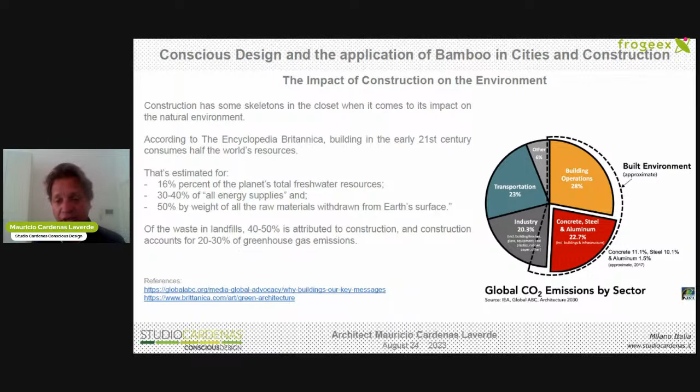So it's quite dramatic. If we keep building the same way and just think about forms—more tilted, high, longitudinal, beautiful—that's not enough. We have to tackle the construction process, and as architects we have to work on this. This is where natural materials are very strategic.

I'm in love with bamboo because of that. Bamboo is a strategic natural resource, and as a plant it's already contributing to at least 7 of the Sustainable Development Goals adopted by the United Nations.

Going back to genius inspiration such as Leonardo da Vinci, he once said, 'Nature is the source of all true knowledge.' We start by looking at other architects' work and get inspired, but that's not enough. We should look at nature and natural materials. That's where conscious design came from.

The philosophy was based on my experiences, both academic and professional, and that's the way we work. Energy saving through technology in the context of an environmental crisis is not enough.

This means that we should definitely start tackling the issues of climate change and of the damage we do to the environment through understanding how to build, through the processes and application of natural materials for construction.

For us, in the first place, is bamboo, which we believe is the product of nature that best integrates the value of ecology, community, nutrition, and beauty.

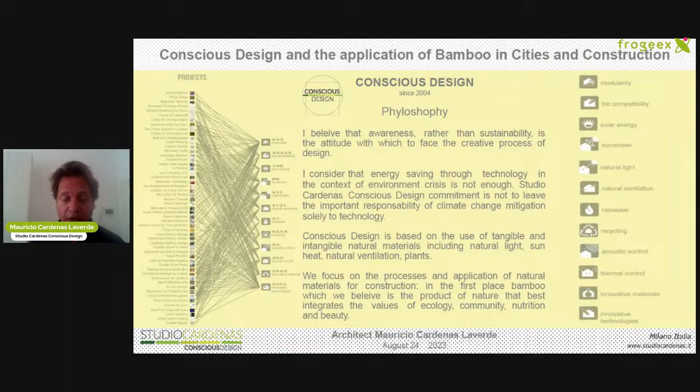There's many other natural materials which are interesting, and even some are not tangible, like natural light, or the heat of the sun. Those are also natural materials, and natural ventilation as well. And we like to work with them as much as possible.

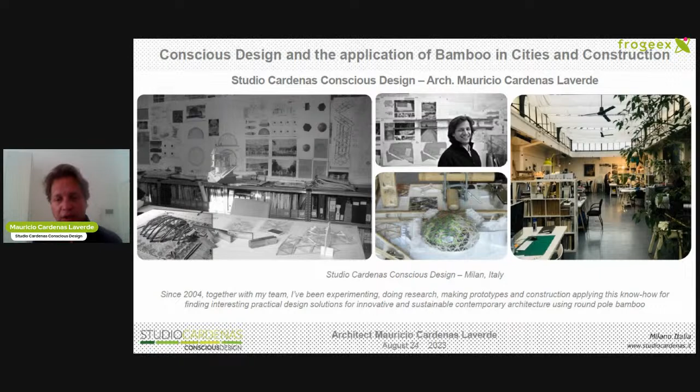Since 2004, this is our little reality studio in Milan, and we design, in fact, how to build. So we've been getting our own hands dirty to understand the best way to build.

Natural materials need to become accessible and easy to build in a context like Europe, which is an industrialized environment, right? Because mostly bamboo buildings, more than 95% of the buildings we see on the internet, bamboo constructions are in countries where specialized manpower is available.

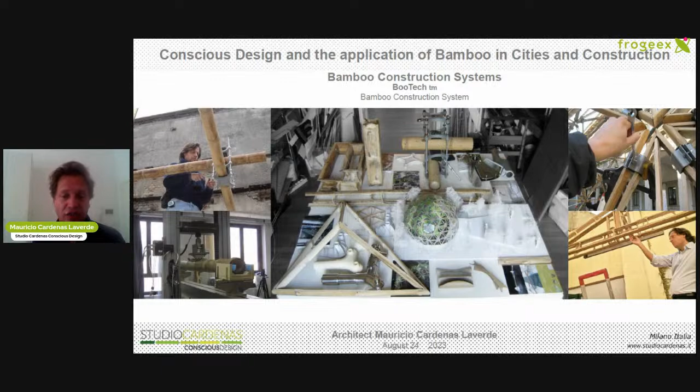In Europe, there's no specialized manpower available for building with bamboo, but there's specialized manpower to build with different technologies, such as dry mounted structures, such as facades. So that's how I designed these systems to build with bamboo.

Even in Milan, we have bamboo that can grow very nicely. There's some species of bamboo which we can already say are Italian, as myself. I'm Colombian, but living after 30 years in Italy, I'm Italian as well. So bamboo is becoming European, is becoming Italian, and it is already.

Very fast, I'll show you some examples: small scale, medium scale, and large scale. These two projects were recently selected by the Union of International Architects, Union Internationale des Architectes, based in France, for the guidebook of architecture for the 2030 agenda.

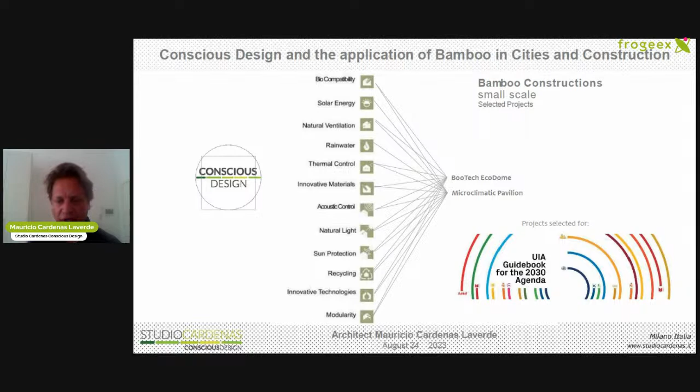This system, dry mounted connections, can be built very easily in Europe with no specialized manpower. We did this small pavilion back in 2006.

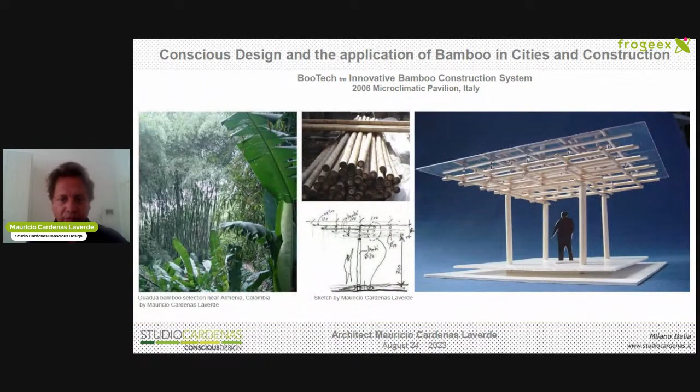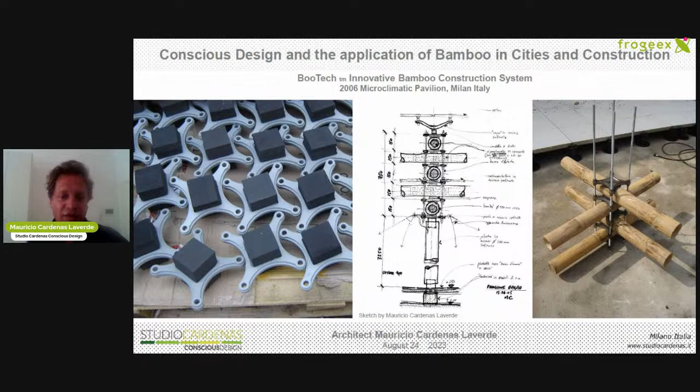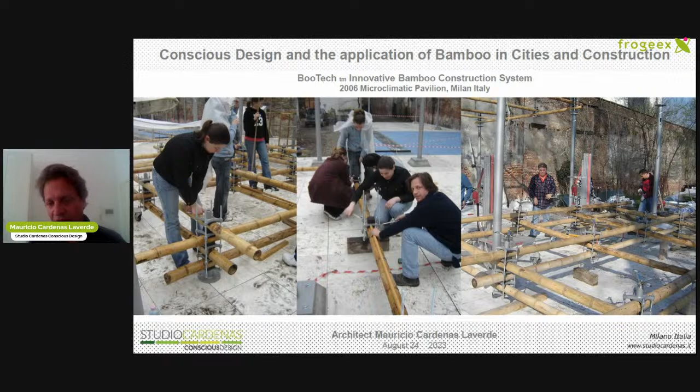We built it ourselves, as I had no client. I have to admit, I was client of myself. It was, how to say, yeah. I believe in it so much that I found sponsorships, and I was sponsored by several companies, and this is the result.

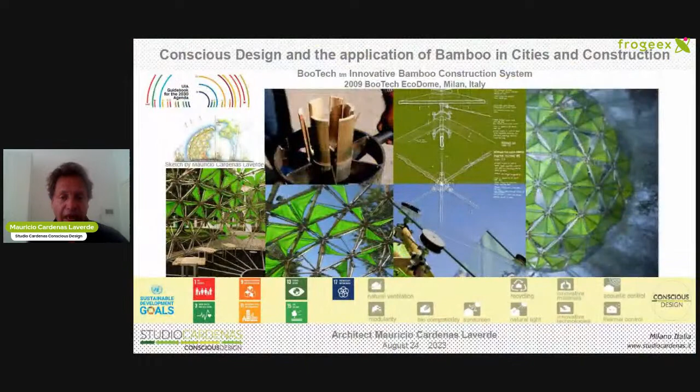Imported bamboo from Colombia. This time there was no bamboo, or at least I had no knowledge about availability of bamboo in Italy. And then we reused the same bamboo to make another structure, also with dry connection.

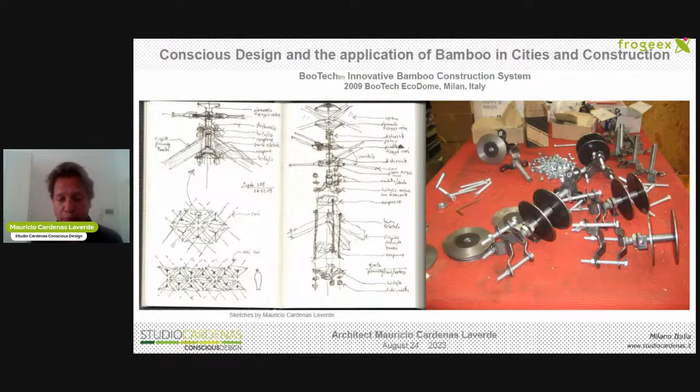So it's designing the systems. It's not just making a building and giving it to the engineers and construction companies for them to resolve, as usually, unfortunately, is done by most architecture companies. But it's resolving the most important problems, which is how to build and how to make bamboo become contemporary and become European, in this case, Italian.

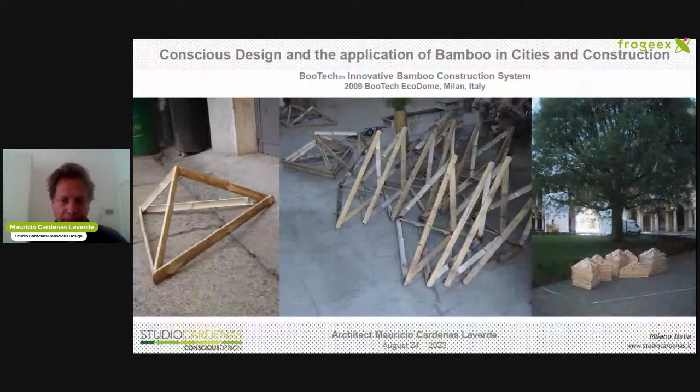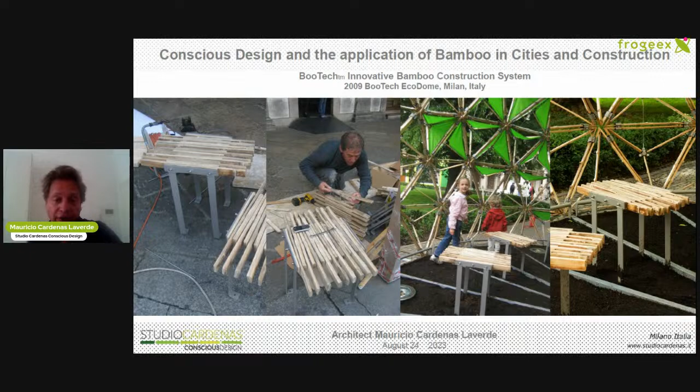Fast, just to show you, here we see earth on the ground, there's soil on the ground. So the soil is another interesting material. Here it's for giving weight to the cupola, giving enough weight for it to be stable. But we'll see in the next project how soil can be a very interesting construction material as well.

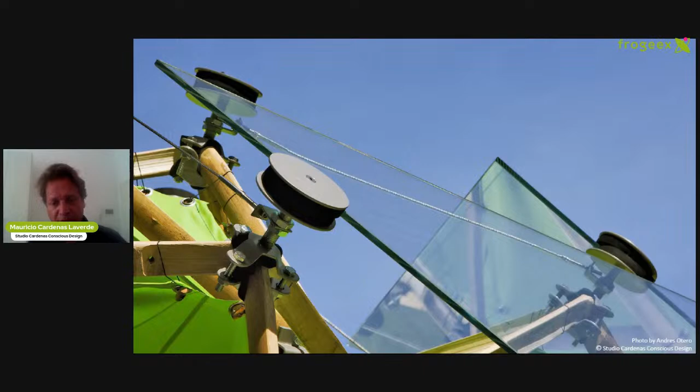The energy efficient bamboo house is a medium scale project, chosen and selected as well for the UIA guidebook for the 2030 agenda. It will be a guidebook for how to build sustainably, how to build in a way to respond to today's climate situation.

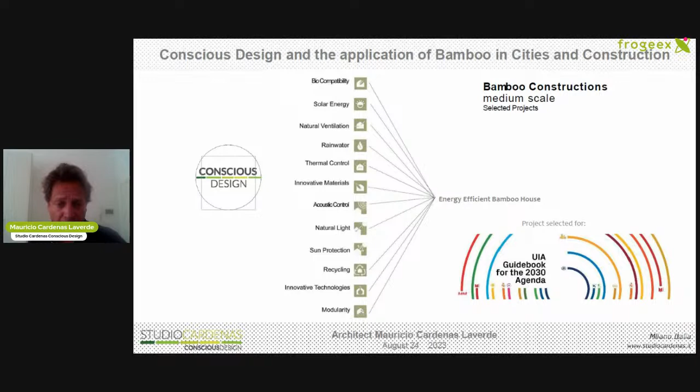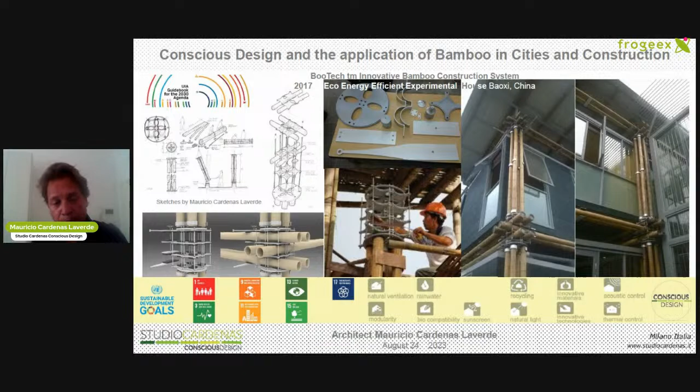This building is part of this environment, which is a bamboo biennale. Several architects, we were invited, 10 architects, and I developed further into a 3-story housing building, pushing forward this construction system, which is called BooTech.

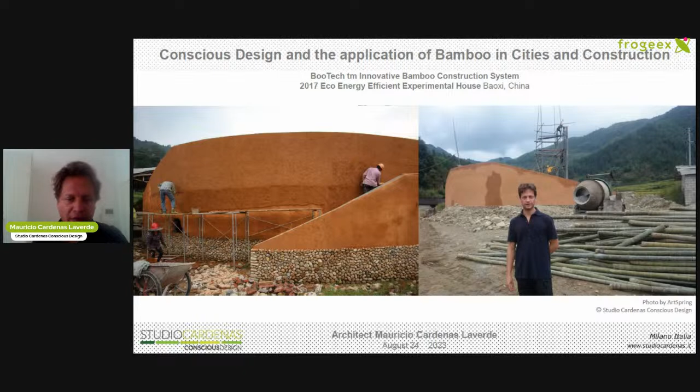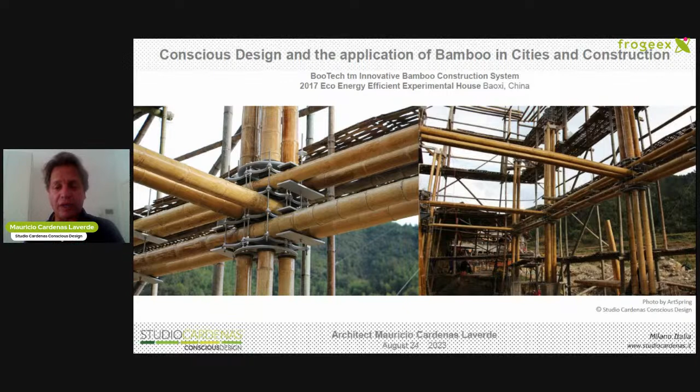And you see there's earth on the ground. The walls are made of rammed earth and bamboo. And you see bamboo is even the scaffolding. So even the construction site is much warmer, much more friendly than a concrete or steel construction. This is the result. So even the interiors are mostly bamboo.

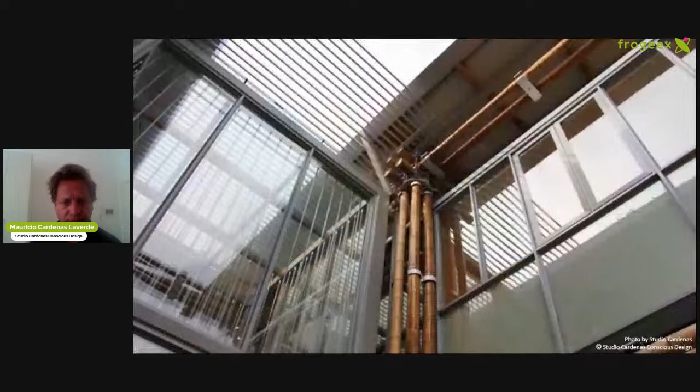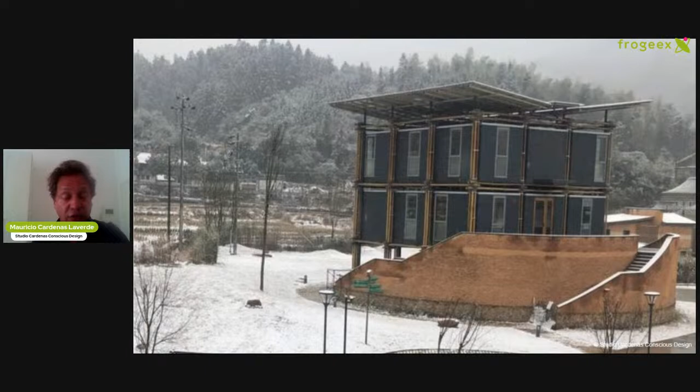The idea is to push bamboo to the cities, to find bamboo projects in the cities as well, because it's in the cities where we have the most problems in terms of gas emissions and extreme heat.

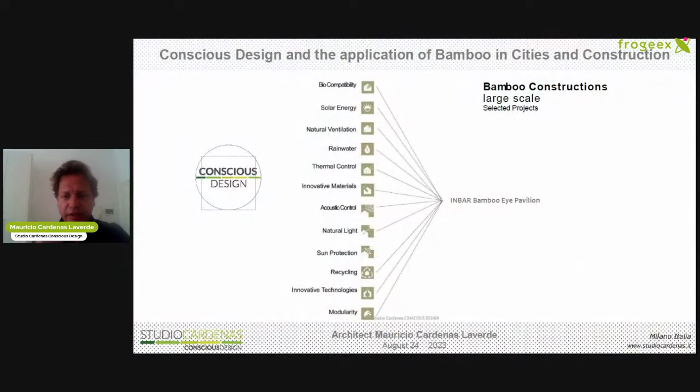Now today in Milan, it's impossible—so hot, we're at about 35 degrees and it's just 10 in the morning. And large scale to finish fast again. We see so you understand that bamboo is very powerful—32-meter span.

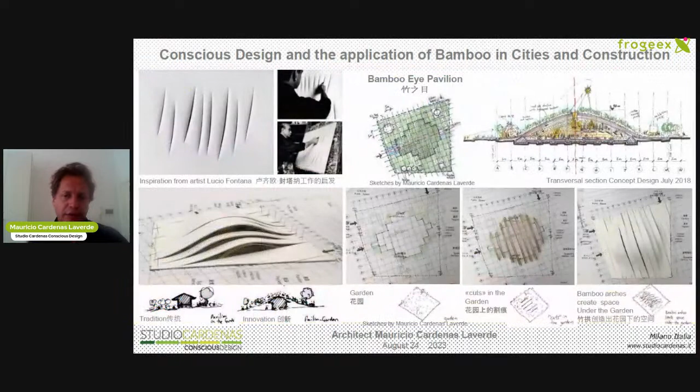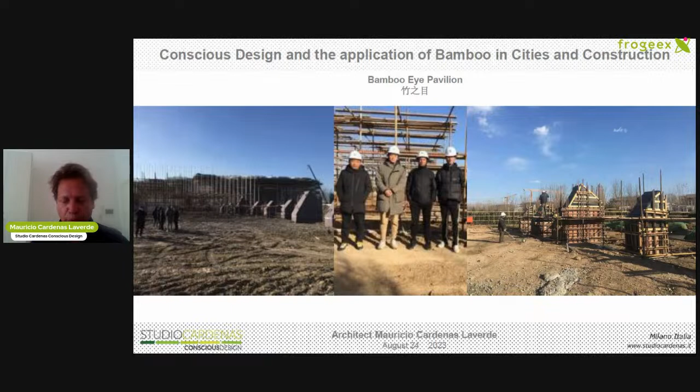This is the way we work, very traditional, sketching models. And this is a construction site, minimizing the use of concrete only where necessary. So there is no concrete slab—only the supports of the arches are in concrete.

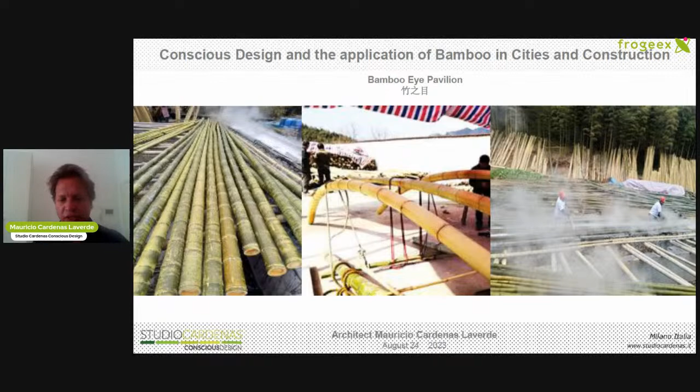And see how beautiful it's working with a natural material. You have to get in contact with it. You go to the forest, you go to see how it's bent. Even the construction is very amazing and fascinating.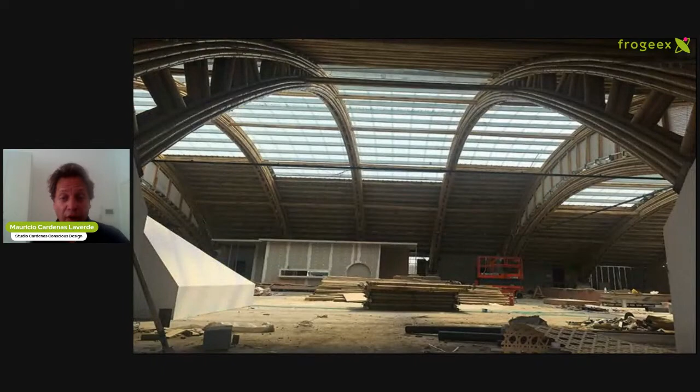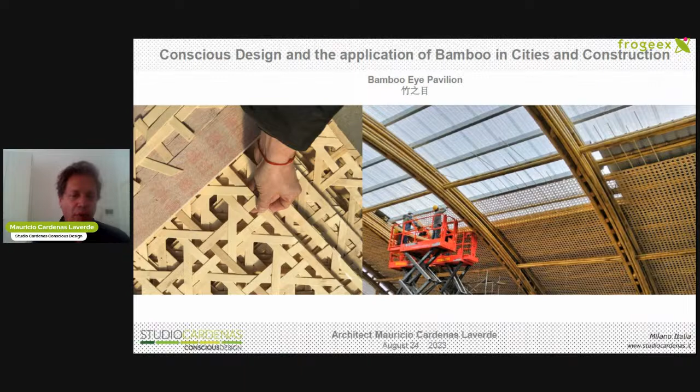So bamboo basically has no limits. The limits are probably by the construction industry, which is just not open to change. They're just—or probably they haven't thought about it, or probably they haven't seen it. So hopefully they will soon see how possible it is to build with natural materials.

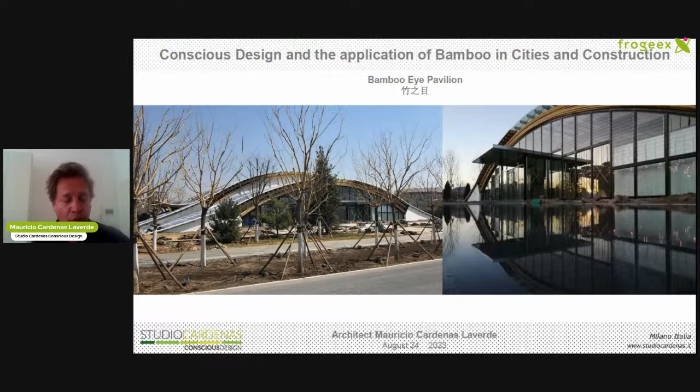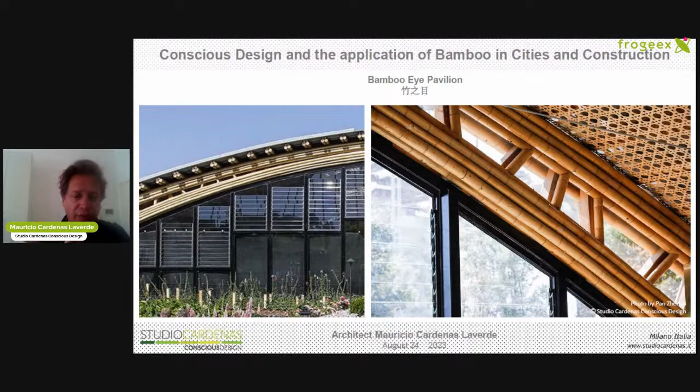Bamboo is one of them, and you can see how facades can be contemporary—glass and bamboo, and of course there's some steel and some aluminum. As bamboo buildings are like human bodies made of different materials, and each material has its own purpose.

And the soil—we use soil instead of concrete for the roof, and it's a garden. Then in the soil, the plants grow on the roof. So it's giving back to the ground what you took from it, right? That's the impact on the environment.

Imagine if the roof was the typical black roof with the waterproof membrane—it would be so hot. Instead, like this, it absorbs the heat, and it also produces oxygen and absorbs carbon dioxide.

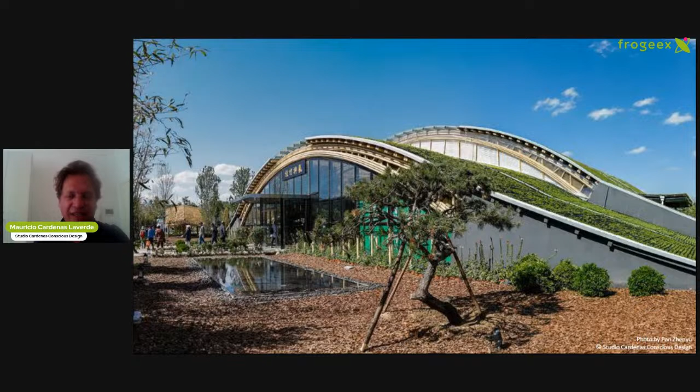I mean, it's just a way of changing the way of thinking, and trying to enjoy designing it from a different point of view—not just artistic, but also getting into the construction process.

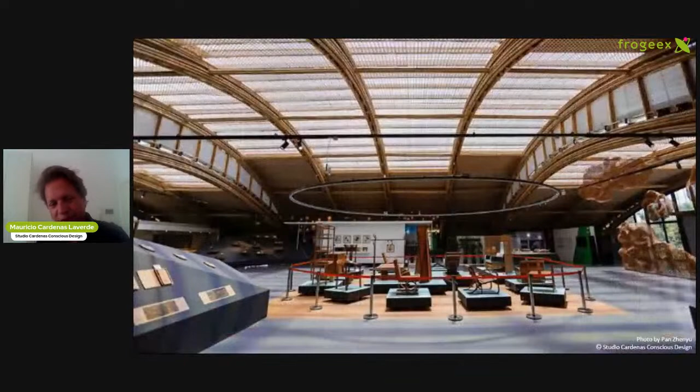Thank you very much. This was a very fast show, very fast—how do you say—presentation. Thank you very much, wow.